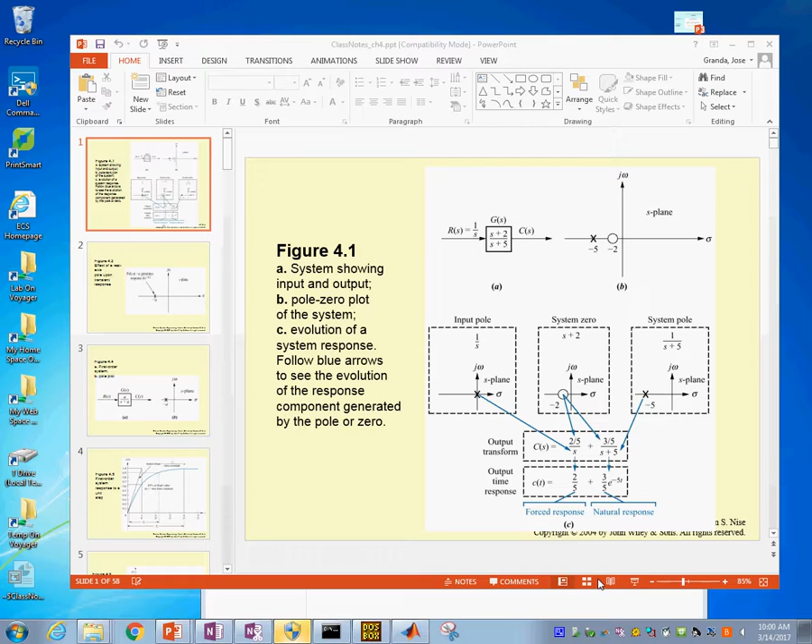Let's discuss now the kind of responses that we should expect of a system if we know the transfer function. So we could entitle this discussion understanding time response using the transfer functions. Now, if you have a transfer function like this, this is a simple transfer function that has s plus 2 and then you have s plus 5.

The first thing that we are going to do is to name these things. You have a polynomial on the numerator and you have a polynomial on the denominator. Okay? If you set the numerator s plus 2 equals 0, then it follows that s is equal to minus 2. You see here, if in the complex plane we plot this, it is at minus 2. So this is right there, yeah? So this, we are going to call it a zero, just a name. The roots of the numerator are called zeros.

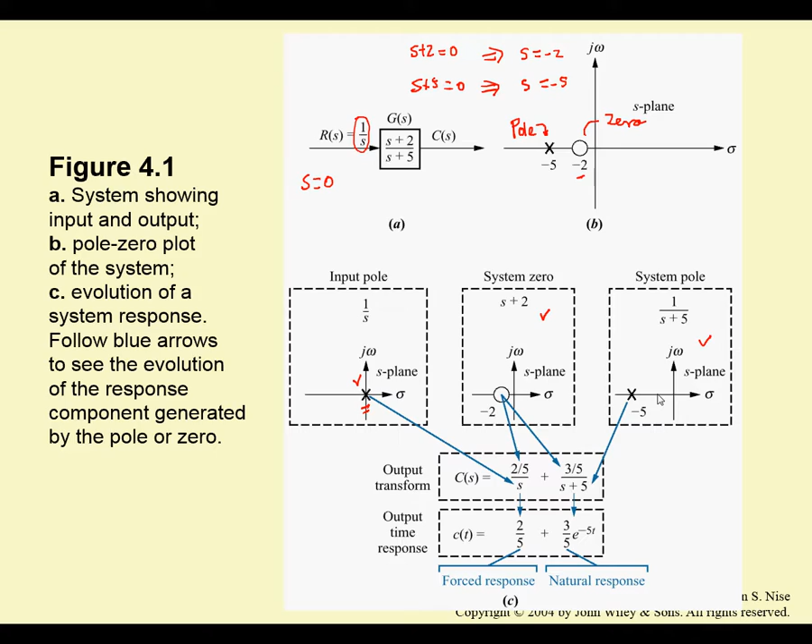We could decompose this into these fractions, and by using the inverse Laplace transform, you say, okay, this has some constant value plus it will follow this term. But the easiest way, it seems to me, would be to go to MATLAB, enter the transfer function, and then look at this. So whenever you have a pole, the idea here is that this is going to generate this kind of response. This is of the type e to the minus at, like that.

Okay, but if you put it outside, let's say right here, not in the real axis, but here, where you have a component on the real and a component on the imaginary axis, this one is a combination of a decay and an oscillation. So by knowing that a pole is here with real plus imaginary components, in this case, the response is going to be like this.

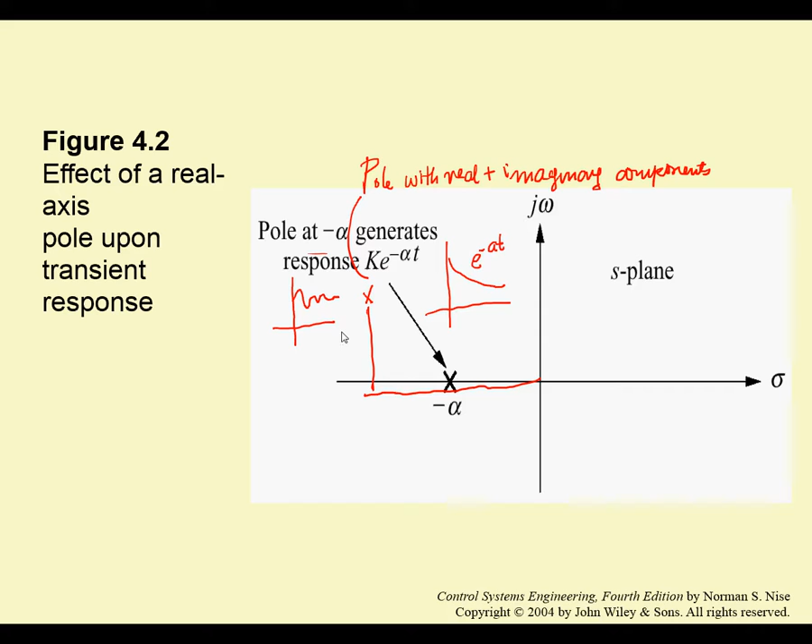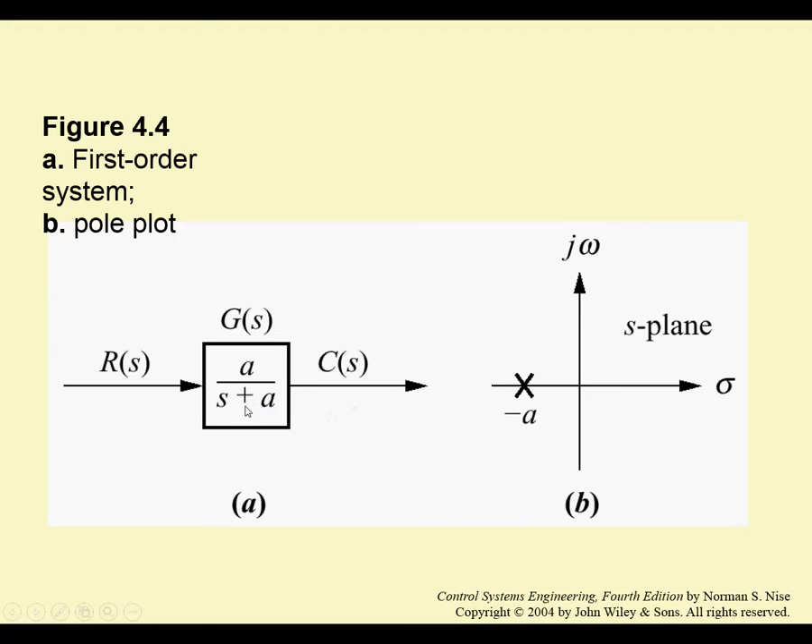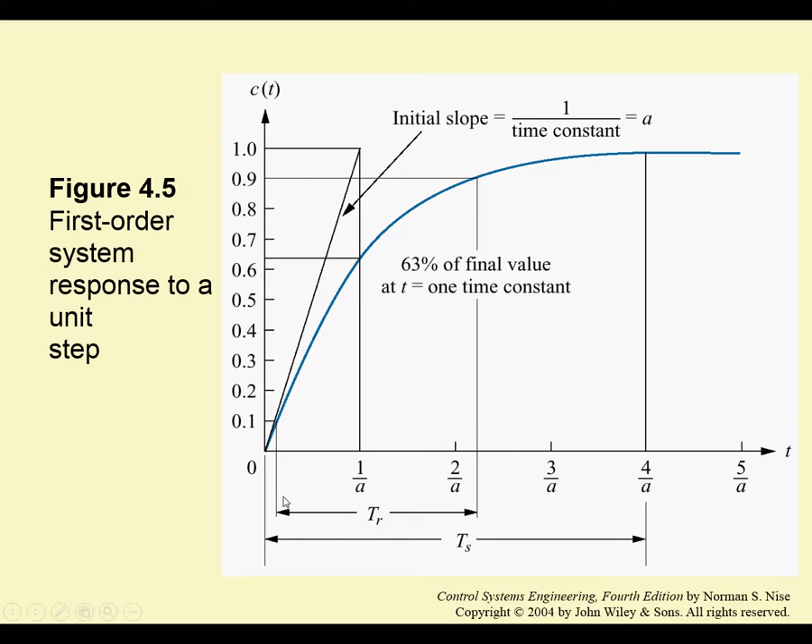So we are going to become experts at reading the complex plane to find out what the answer is. So in here, if you plot it in the time domain, you will have a response that goes from 0 all the way to, if the input is 1, it would be like this. But we are going to give some names to some things on the response. The initial slope in here, 1 over that is the so-called time constant, which is a measure of how fast or how slow the system responds. So this is like a step input on a system.

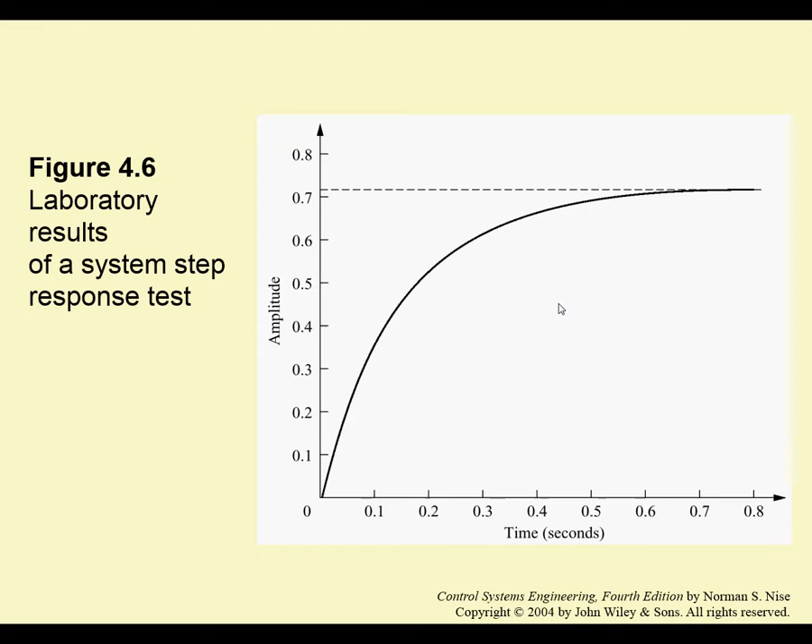So we're going to test the signals. What I would like to show you is that if you have this kind of transfer function, with this denominator, you are going to produce this response. If you have this kind, you will get this response. If you have it like this, you get like this. So I think it would be really helpful as we are starting this to try each one of the systems in MATLAB and show you that in fact they respond like that. Let's try that.

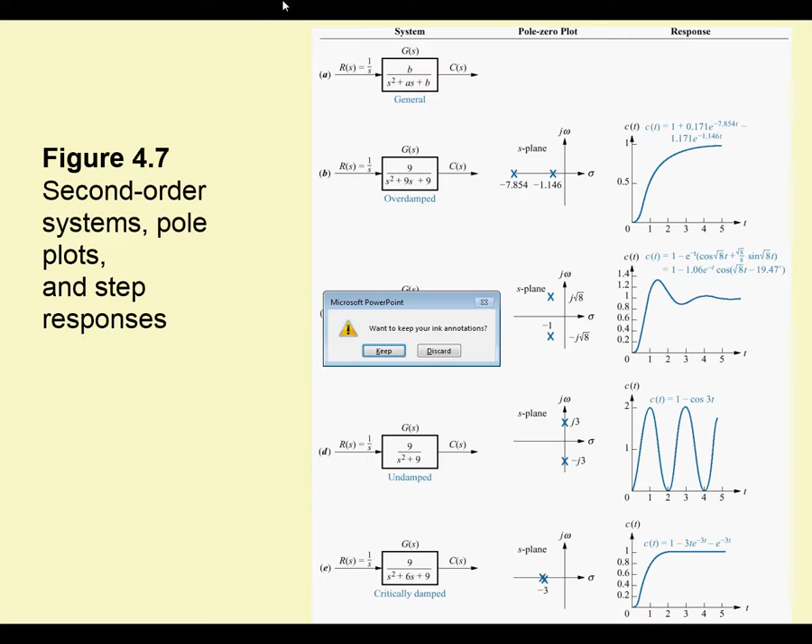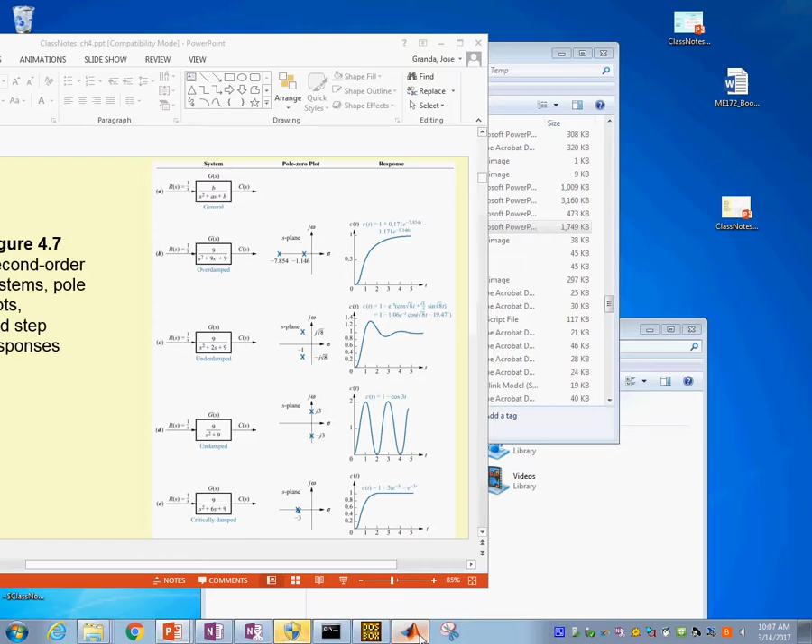So let's put this in the background here, and I am going to go to MATLAB. I have it open here. We're going to work with a new file, and what I'm going to show you is, first of all, how do we enter this transfer function. The way we do it is to define the variable s as a transfer function type of element. s is going to be symbolic, like s is equal to sym.

So it is like this, or we could define it as an individual transfer function element. But let's see where we go with this.

So in here, we could say the numerator is equal to the polynomial constant, this is 9, in there, like that, and then you have the denominator is equal to, what do we have, 1 for s squared, and then the other one is 9s, right, 9, and the constant term is also a 9.

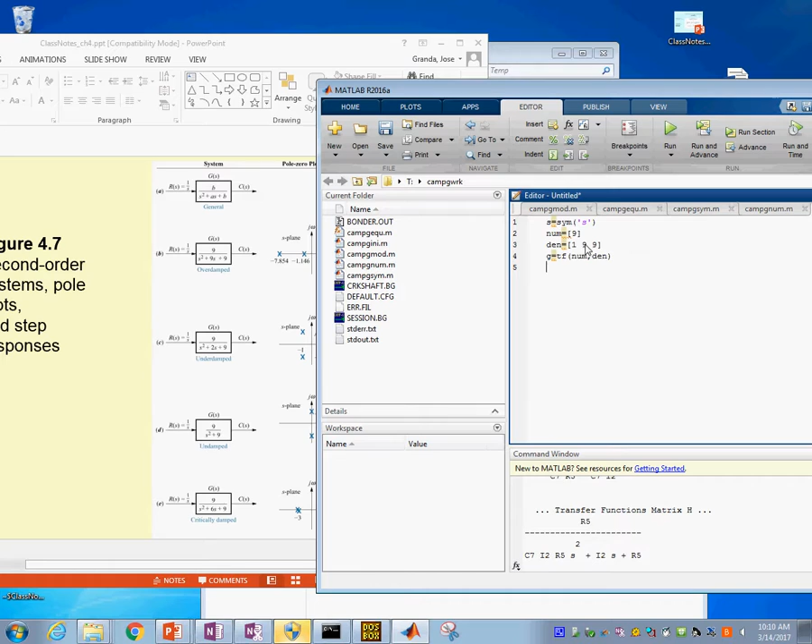And we should be able to get a response here. We have to run this, obviously. So if we run this, save, you'll get the transfer function here. Sorry, I didn't want to, there we go. See, so we get this transfer function. All right. So this is the transfer function here.

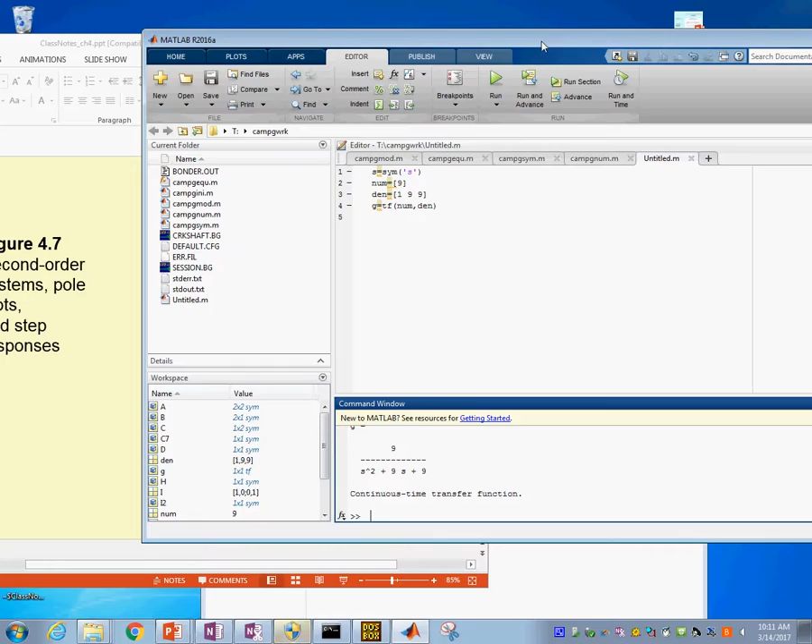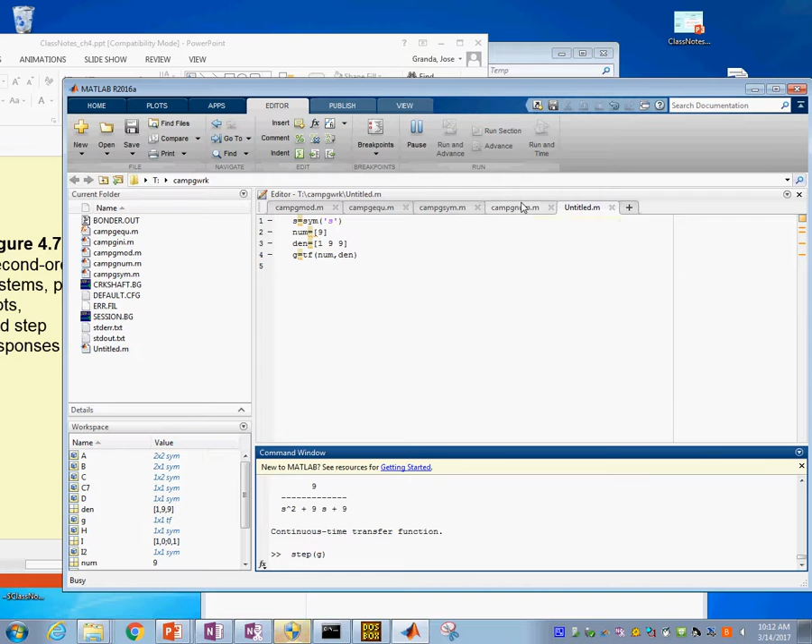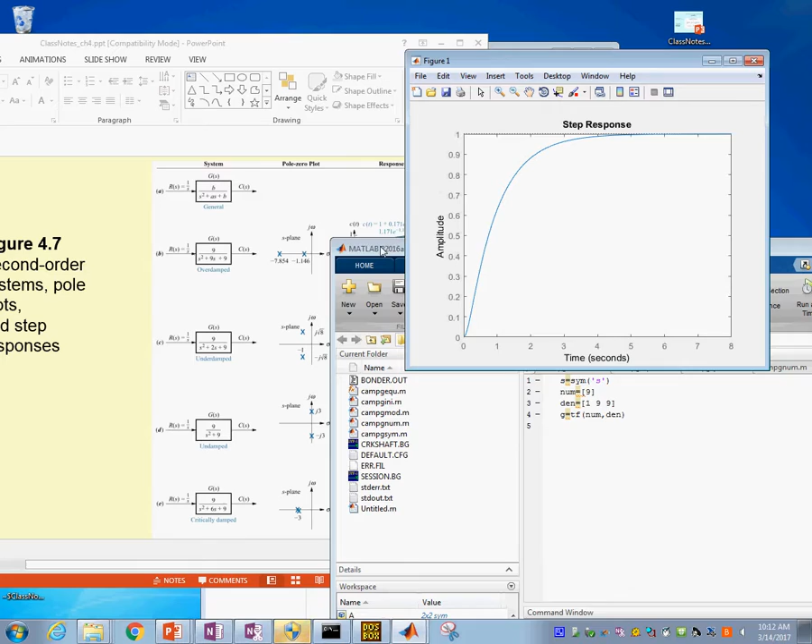Now, can we get a response from this so as to verify that this system in fact is going to do that? So you're going to say a step of g like this, and look what will happen. And that is in fact how it responds. You see, this plot is like what you have right here. See, this is like this.

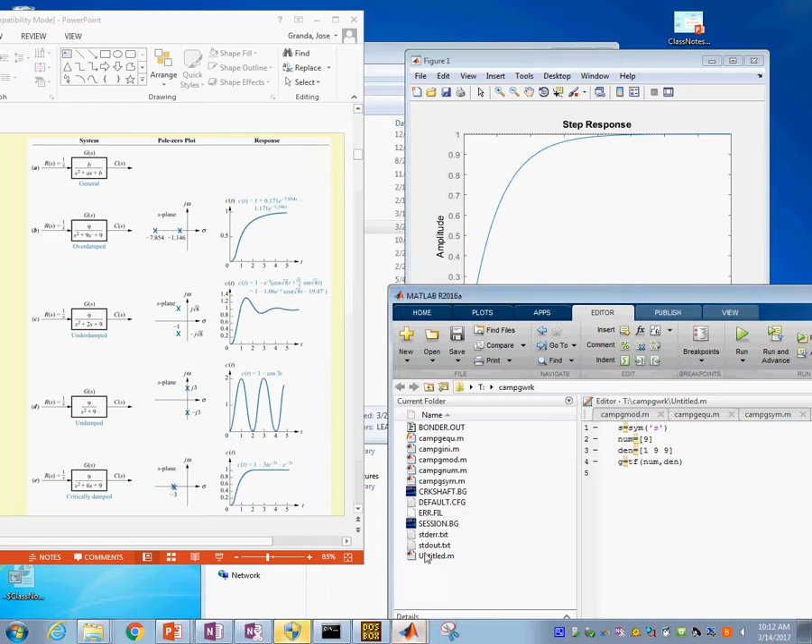But if you actually change this and the poles are no longer on the real axis, but they are over here, let's say, just by changing the 9 to a 2, we will get a totally different response. So let's take a look at that. Let's go back to MATLAB here, and we are going to change this. Instead of a 9, we're going to make it a 2. Oh, I think it was a 3, right? Yeah, 3. And then if we run this, you'll get the transfer function.

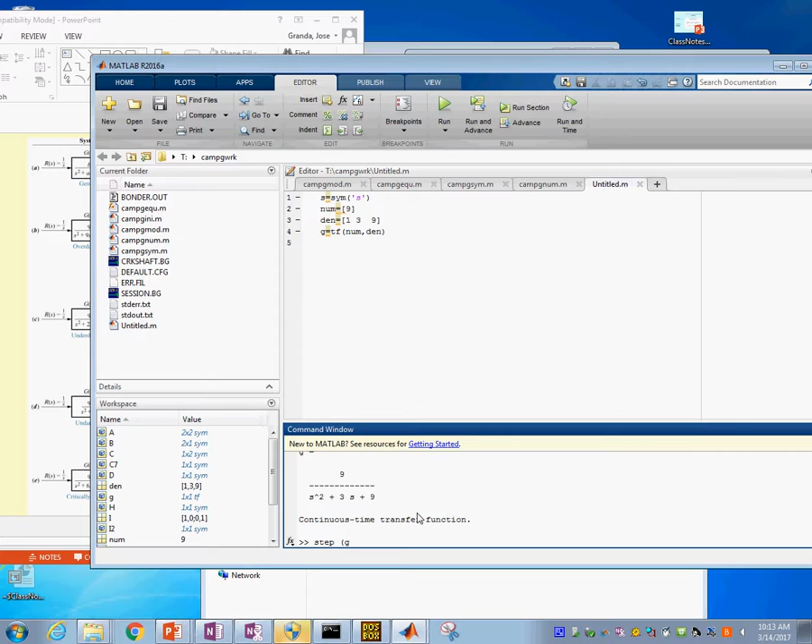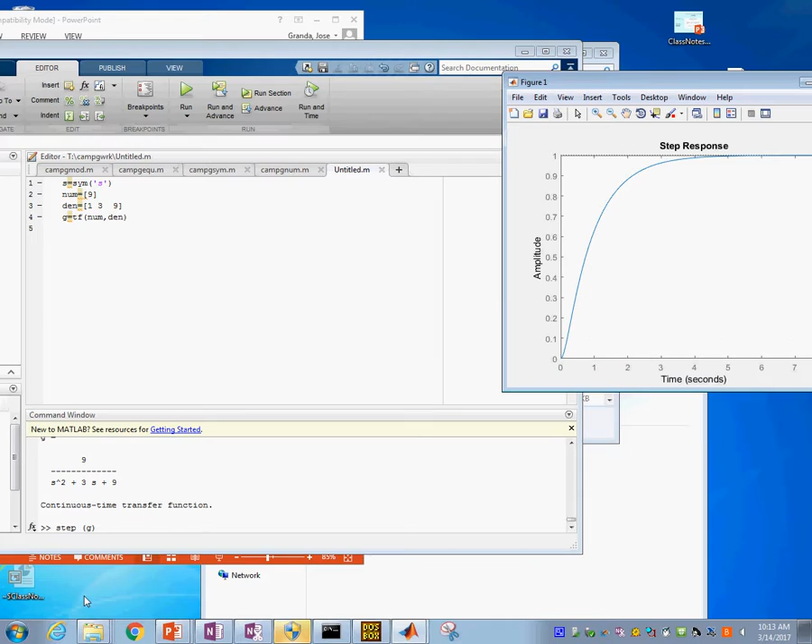There it is. And then in here, we are going to say a step of the transfer function g. And I should see the plot. See, it's behind here. So let's move it so we can actually see what it's going to do. Yeah, and there it is. So you see it changed the way the system responds.

My point, and I want to leave you with this thinking, is that if you change the transfer function and you move those poles, you can obtain a different answer. So the main focus of this discussion is that if we have the ability to move the poles, we have the ability to change the system. That's the point. But not only the poles, the zeros too. Or could we do a combination of zeros and poles and make it do what we want? That's the center of this discussion here.

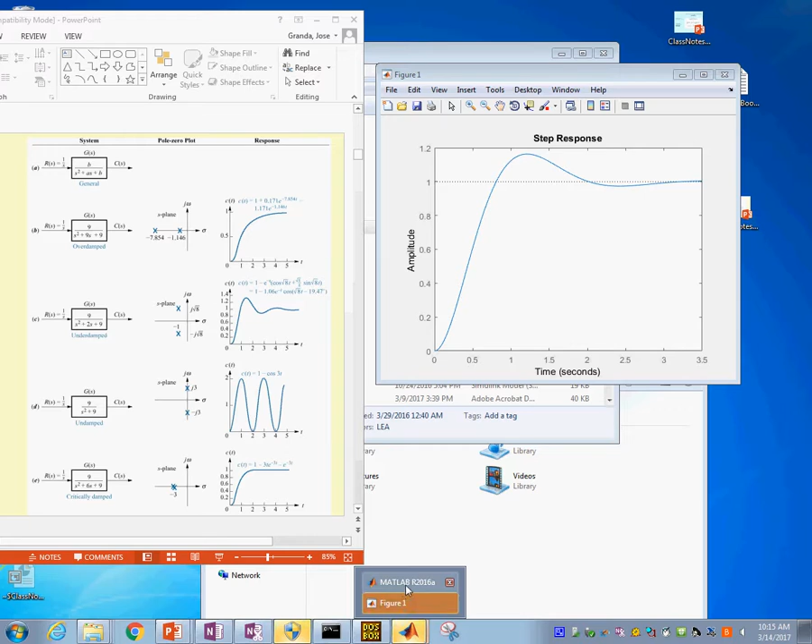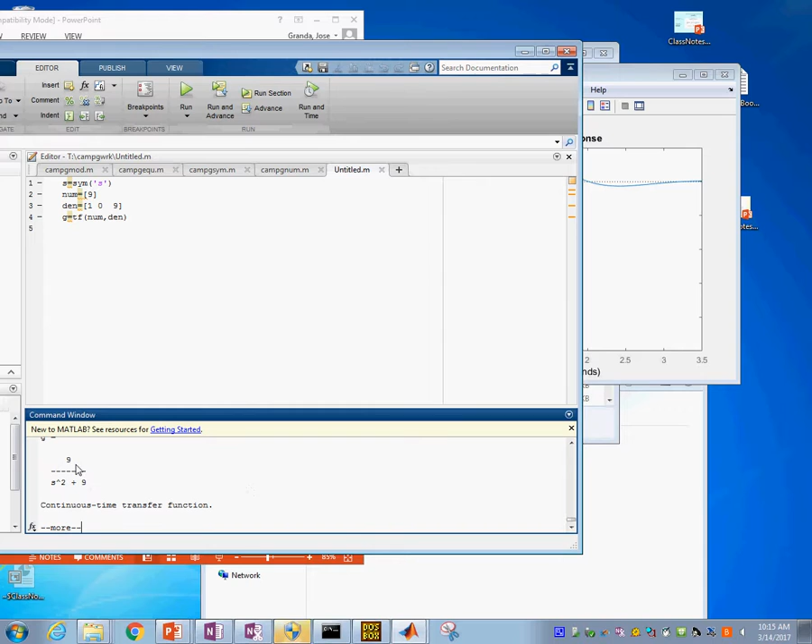I'll let you try the next one, although maybe it's just as good that we take this term away, the second term, and when you do that, you have the roots on the imaginary axis. So if we go to MATLAB in here, and instead of this 2 we put a 0, which is the same thing, we will obtain a new transfer function here. Yeah, there it is. That transfer function is like this one.

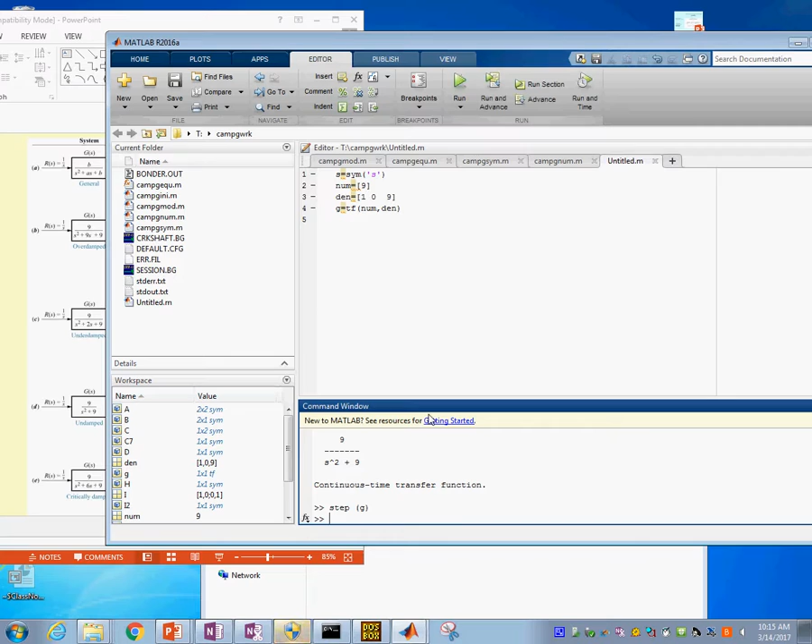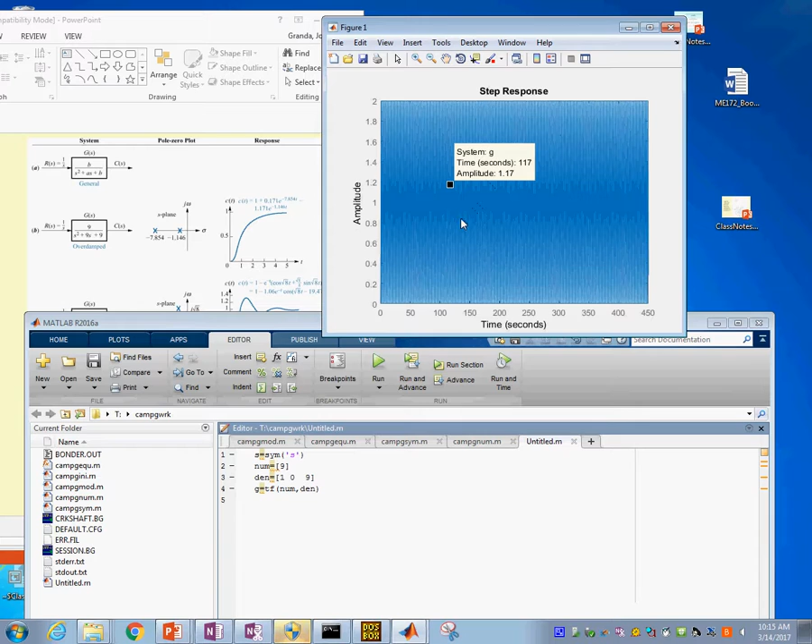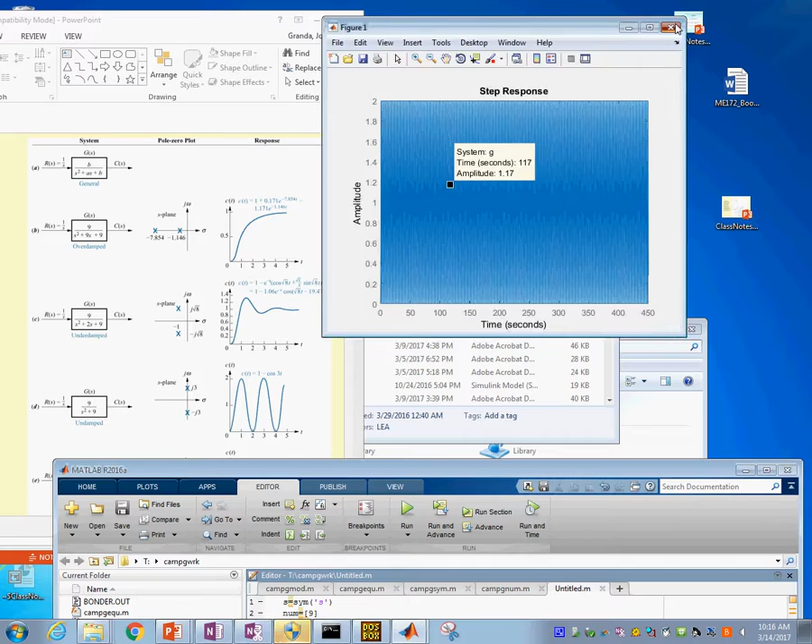Okay? And so if we try the same command that we have, this command is step, watch what happens now. Oops, there are too many of those to see, but the response that we have is this one. It's just that you see so many of them. And here perhaps we shouldn't have the plot over here, but rather have a different step. But that's the idea, that you get a totally different response by changing this. So